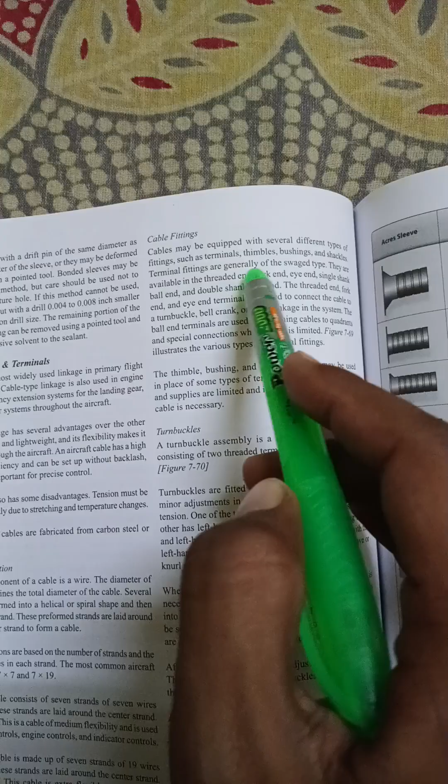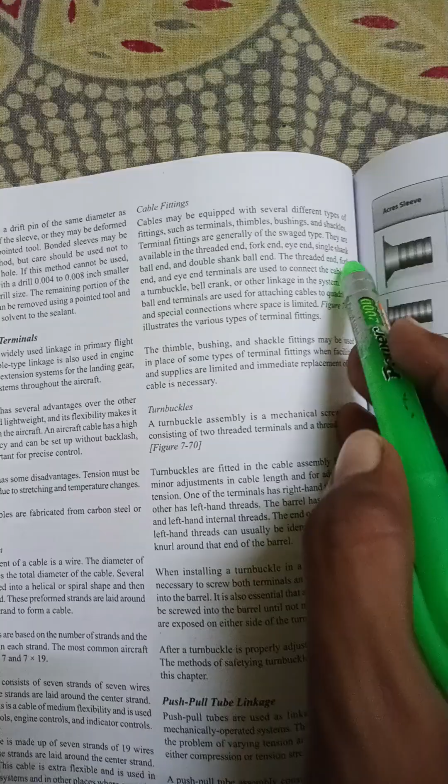These are the cable fitting types. Terminal fittings are generally of the swaged type. They are available in the threaded end, fork end, eye end, single shank ball end and double shank ball end. The threaded end, fork end and eye end are used to connect the cable to a turnbuckle, bell crank, or other linkage in the system. The ball end terminals are used for attaching cables to quadrants and special connections where space is limited.

Illustrated the various types of terminal fittings.

Next we come to turnbuckles. A turnbuckle assembly is a mechanical screw device consisting of two threaded terminals and a threaded barrel.

Push pull tube linkage. Push pull tubes are used in linkages in various types of mechanically operated systems.

This type of linkage eliminates the problem of varying tension and permits the transfer of either compression or tension stress through a single tube.

A push-pull tube assembly consists of a hollow aluminum alloy or steel tube with an adjustable end fitting and a check nut at the other end. The check nut secures the end fitting after the tube assembly has been adjusted to its correct length.

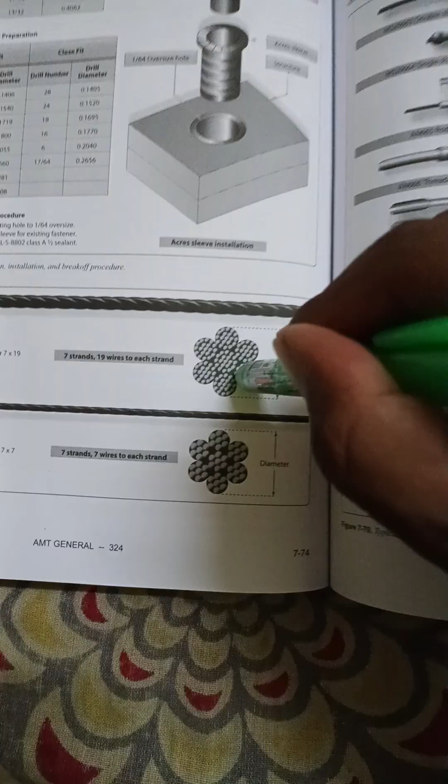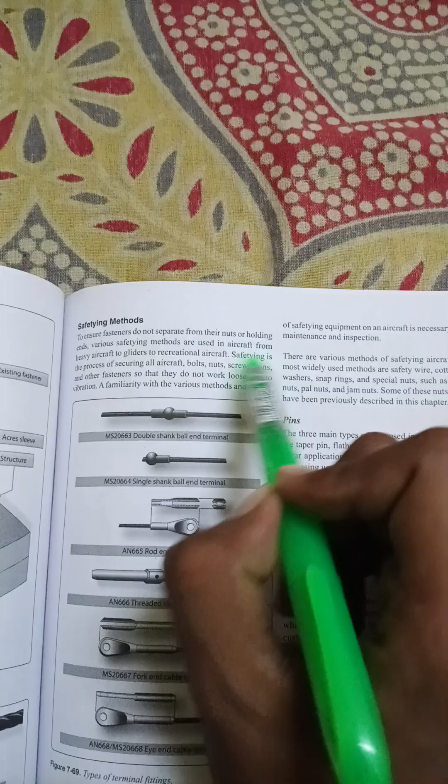Safetying method. To ensure fasteners do not separate from their nuts or holding ends, various safety methods are used in aircraft, from heavy aircraft to gliders to recreational aircraft.

Safetying is the process of securing all aircraft bolts, nuts, screws, pins, and other fasteners so that they do not work loose due to vibration.

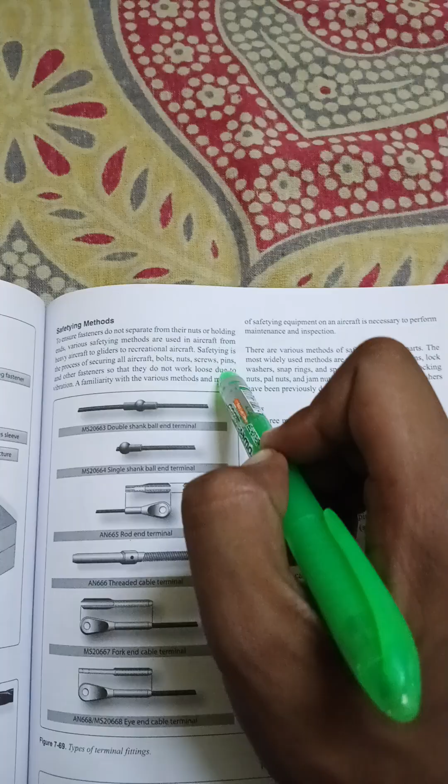A familiarity with the various methods and means is needed. There are various methods of safetying aircraft parts.

The most widely used method is safety wire. The most commonly used safety devices are safety wires, cotter pins, lock washers, snap rings, and special nuts such as self-locking nuts, pal nuts, and jam nuts. Some of these nuts and washers have been previously described in this chapter.

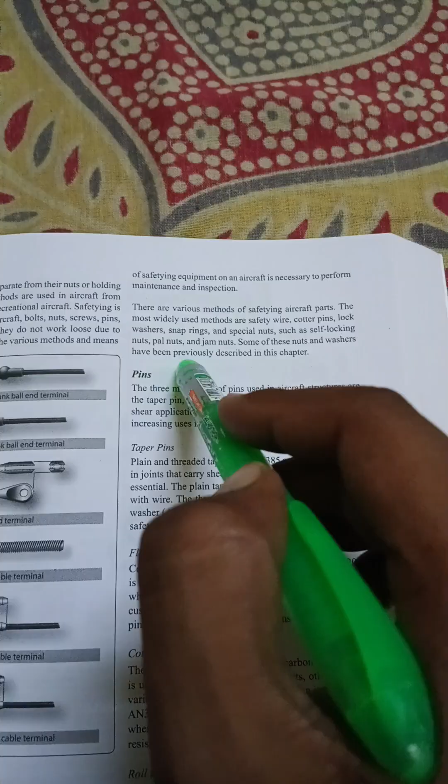Pins. There are three types of pins: taper pins, flathead pins, and cotter pins. Taper pins and threaded taper pins.

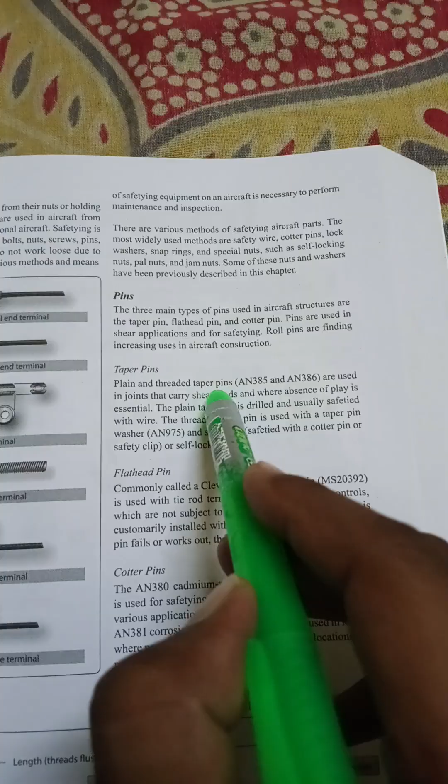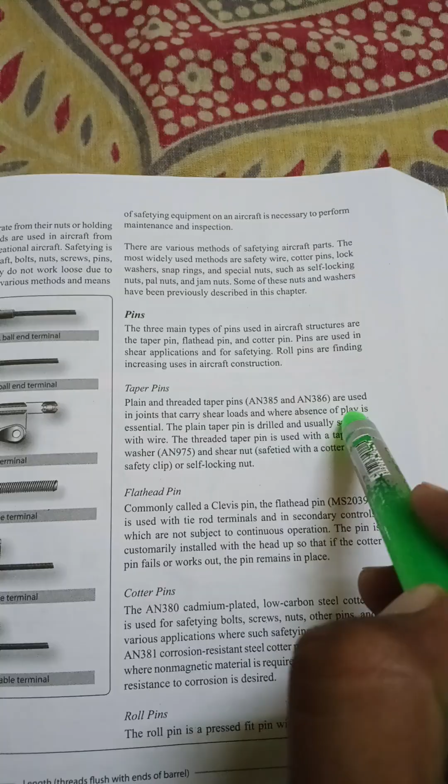AN385 - AN means Army Navy - 385 and AN386 are used in joints that carry shear loads and where absence of play is essential.

Next comes the flathead pin, commonly called a clevis pin. It is also called a clevis pin.

MS20392 is used with tie rod terminals and in secondary controls which are not subject to continuous operation. The pin is customarily installed with the head up, so that if the cotter pin fails or works out, the pin remains in place.

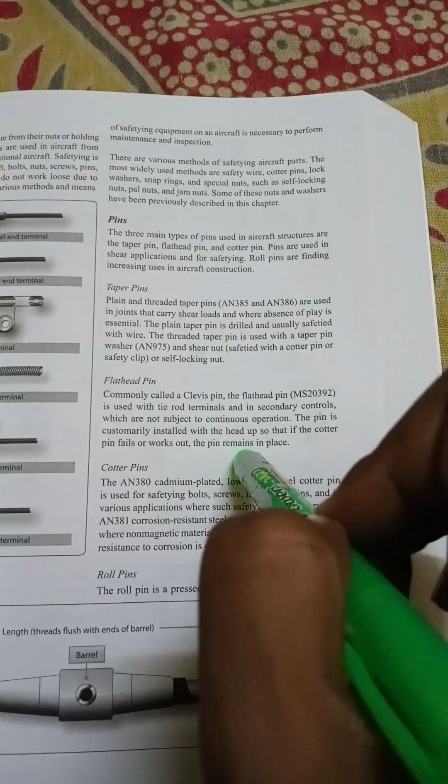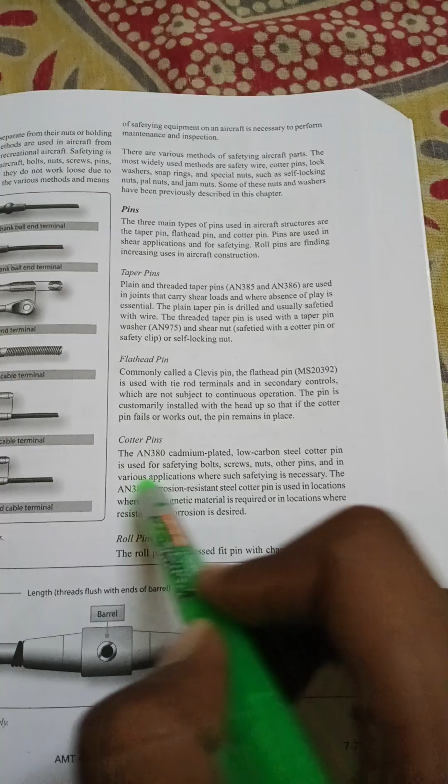If it fails or comes loose, it still stays in its place. Cotter pins: the AN380 cadmium-plated low carbon steel cotter pin is used for safetying bolts, screws, nuts, other pins, and in various applications where such safetying is necessary.

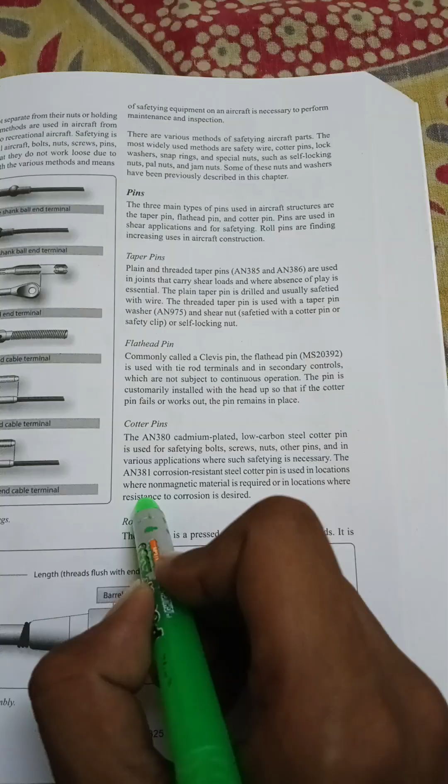The AN381 corrosion resistant steel cotter pin is used in locations where non-magnetic material is required, or in locations where resistance to corrosion is desired.

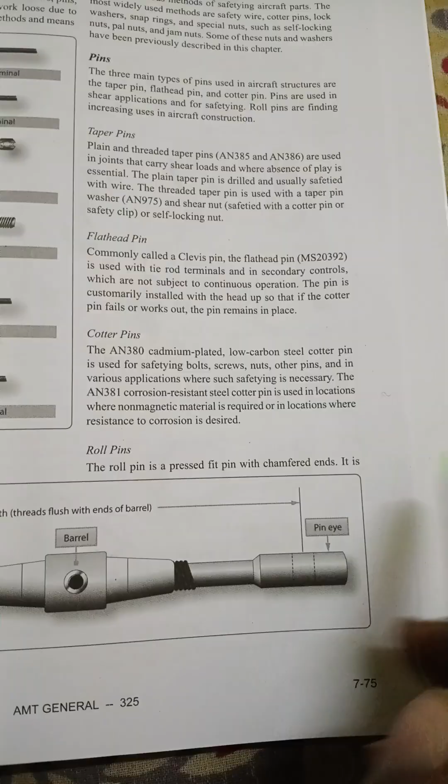Roll pin: the roll pin is a press-fit pin with a chamfered end. It is tubular in shape and is slotted the full length of the tube.

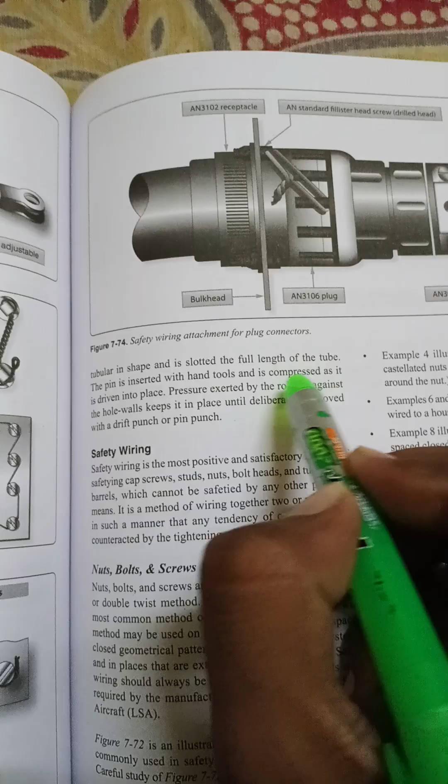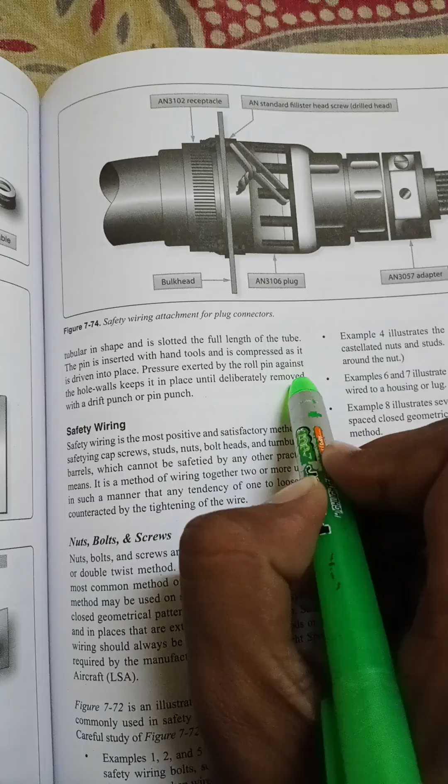The pin is inserted with hand tools and is compressed as it is driven into place. Pressure exerted by the roll pin against the hole wall keeps it in place until it is deliberately removed with a drift punch or a pin punch.

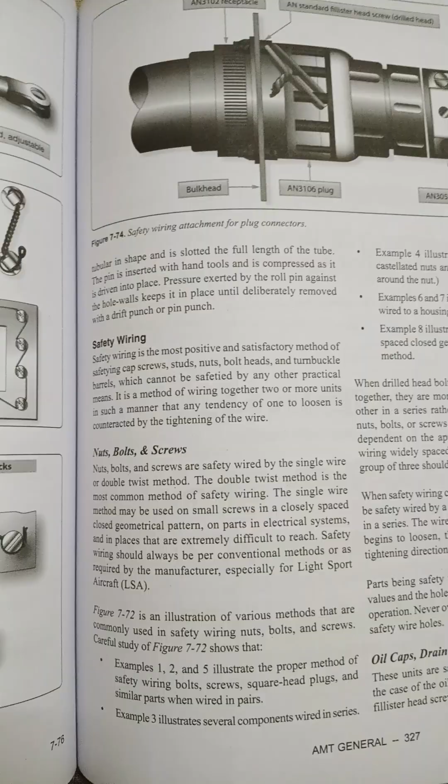Safety wiring. Safety wiring is the most positive and satisfactory method of safetying cap screws, studs, nuts, bolt heads, and turnbuckle barrels which cannot be safetied by any other practical means.

It is a method of wiring together two or more units in such a manner that any tendency of one to loosen is counteracted by the tightening of the wire.

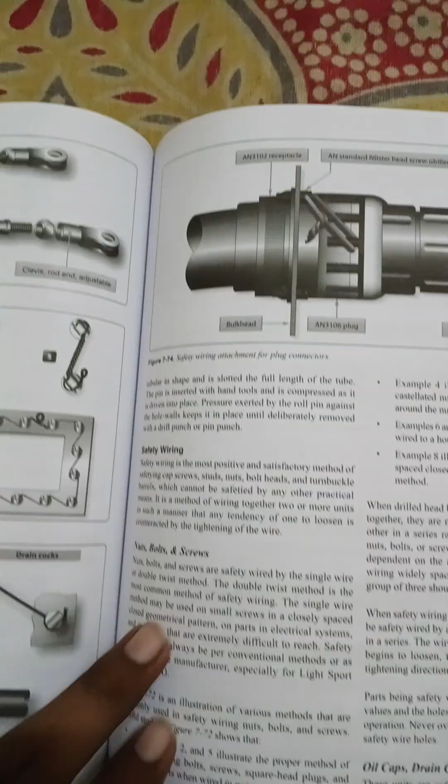Nuts, bolts, and screws are safety wired by the single wire or double twist method. The double twist method is the most common method of safety wiring.

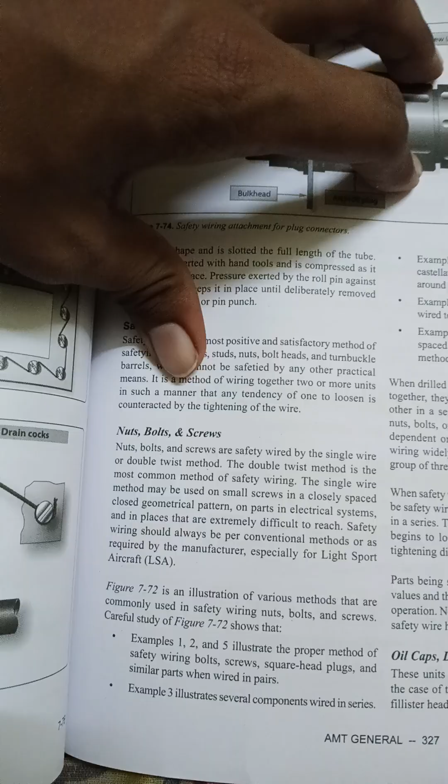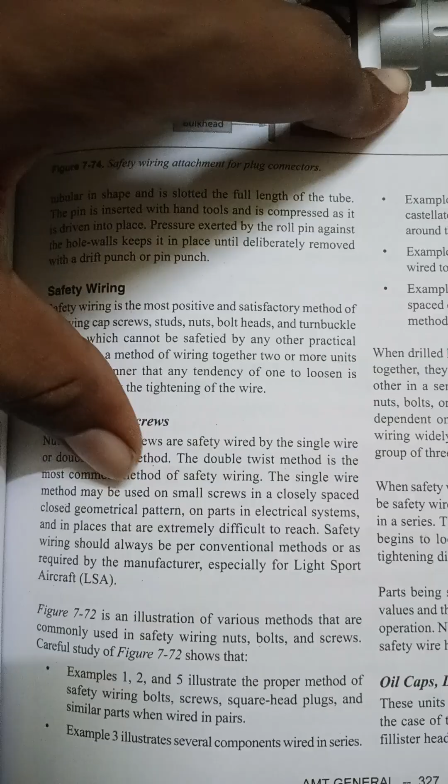The single wire method may be used on small screws in a closely spaced, closed geometric pattern on parts in electrical systems, and in places that are extremely difficult to reach.

Safety wiring should always be done per conventional methods or as required by the manufacturer, especially for light sport aircraft (LSA).

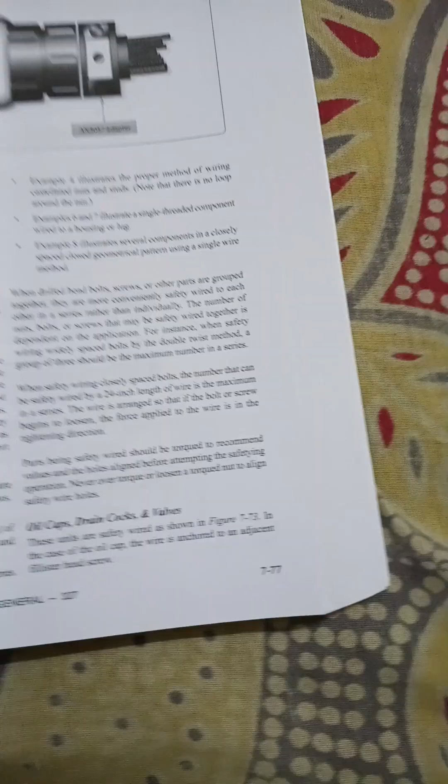Then we come to oil caps, drain cocks, and valves. These units are safety wired as shown in figure 7-73. In the case of the oil cap, the wire is anchored to an adjacent filter head screw.

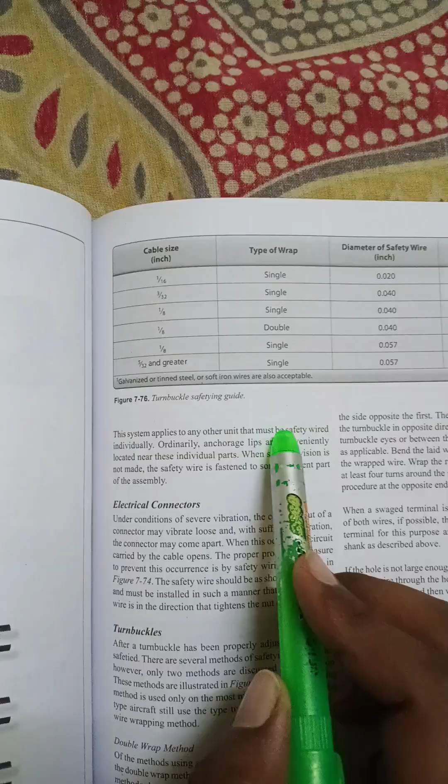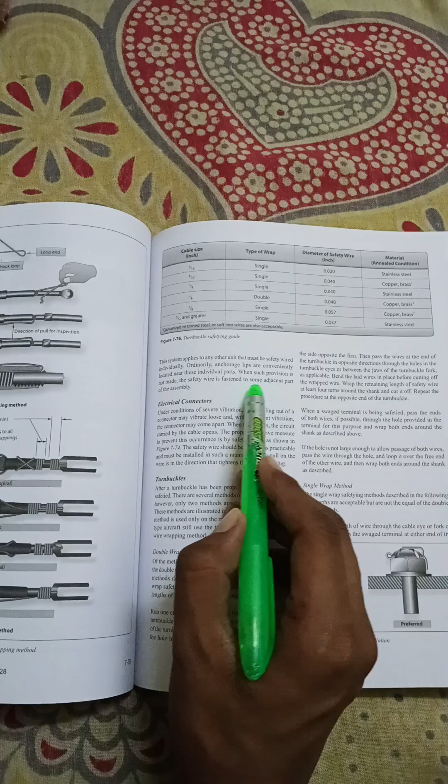This system applies to any other unit that must be safety wired individually. Ordinarily, anchorage lips are conveniently located near these individual parts. When such provision is not made, the safety wire is fastened to some adjacent part of the assembly, such as an electrical connector.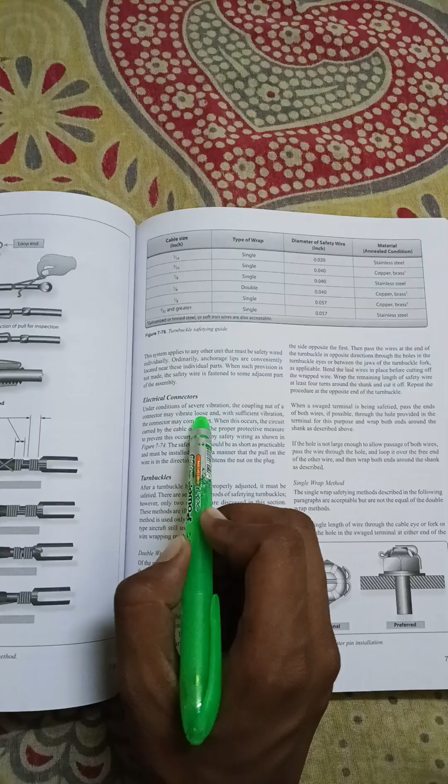Under conditions of severe vibration, the coupling nuts of a connector may vibrate loose, and with sufficient vibration, the connector may come apart. When this occurs, the circuit carried by the cable opens.

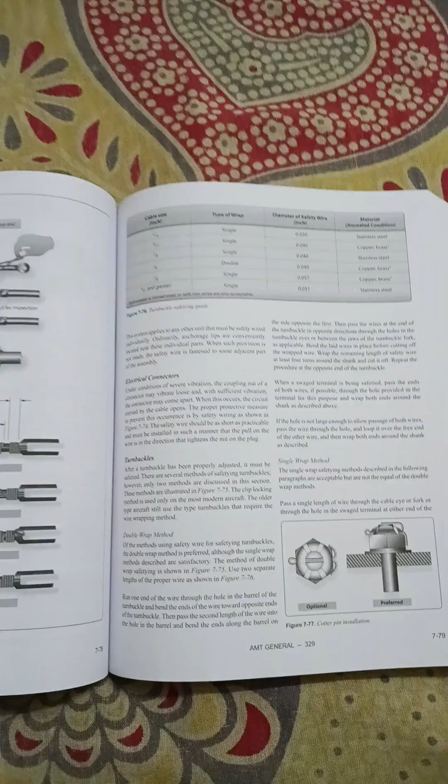The proper protective measure to prevent this occurrence is by safety wiring as shown in figure 7.74. The safety wires should be as short as practicable and must be installed in such a manner that the pull on the wire is in the direction to tighten the nut on the plug.

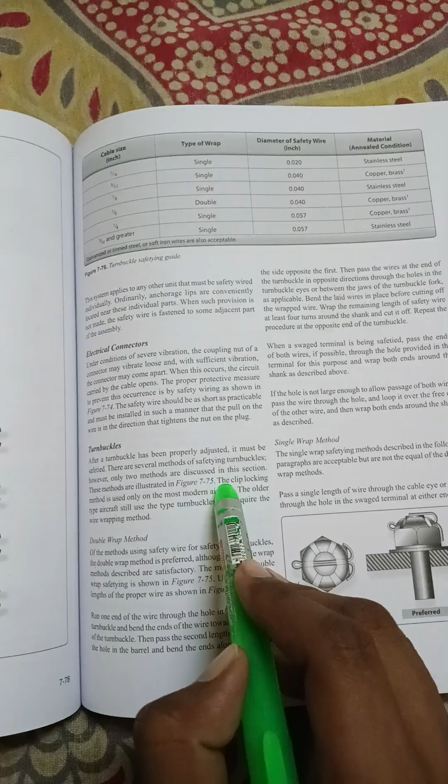Next comes turnbuckles. After a turnbuckle has been properly adjusted, it must be safety tied. There are several methods of safetying turnbuckles, however two methods are discussed in this section. The methods are illustrated in this figure. The clip locking method is used only on the most modern aircraft.

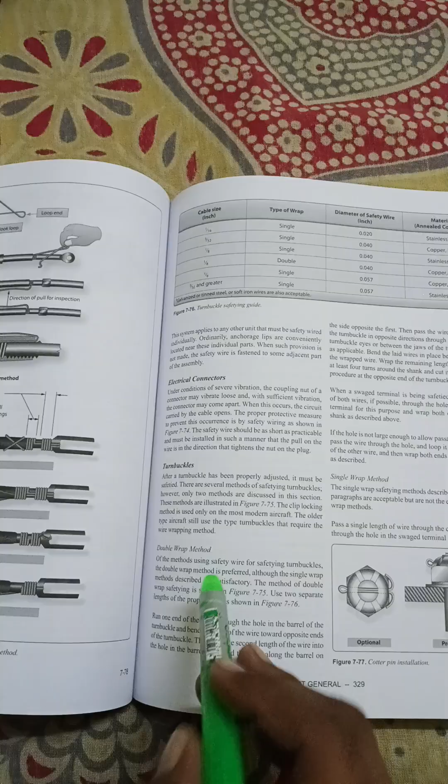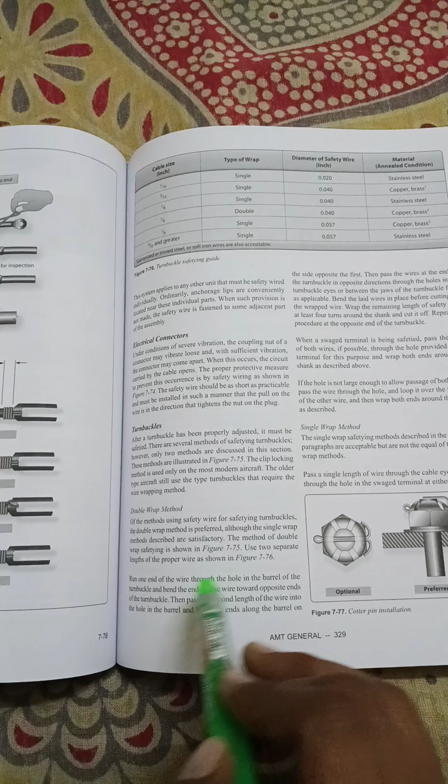The older type aircraft still use the turnbuckle that requires the wire wrapping method, including the double wrap method. Of these methods, safety wires for safetying turnbuckles, the double wrap method is preferred, although the single wrap method is also satisfactory.

Then comes the single wrap method. The single wrap safetying method described in the following paragraph is acceptable but is not the equal of the double wrap method.

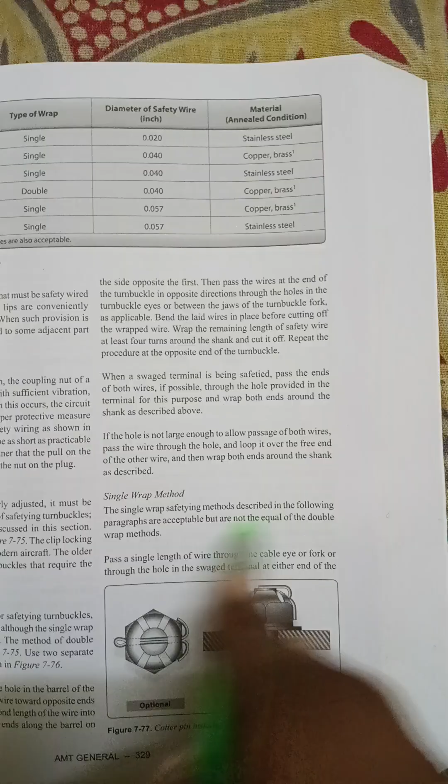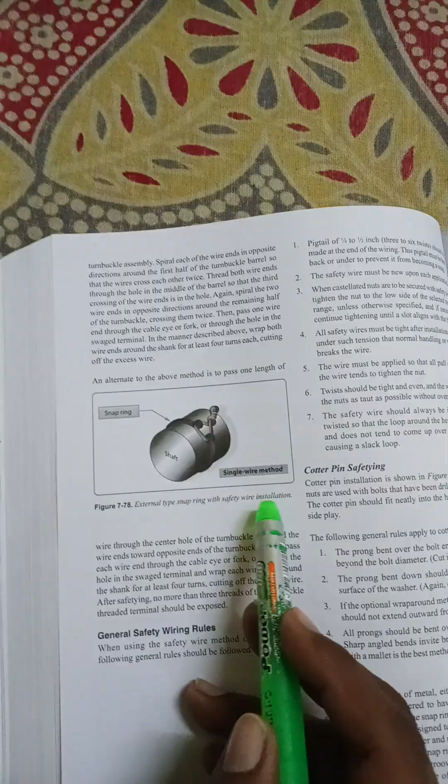External type snap ring with safety wire installation, this comes next and last.

General safety wiring rules. When using the safety wire method of safetying, the following general rules should be followed. A pigtail of 1/4 to 1/2 inch, 3 to 6 twists, should be made at the end of the wire. The pigtail must be bent back or under to prevent it from becoming a snag.

The safety wire must be new upon each application where castellated nuts are to be secured with safety wires. Tighten the nut to the low side of the selected torque range unless otherwise specified, and if necessary continue tightening until a slot aligns with the holes.

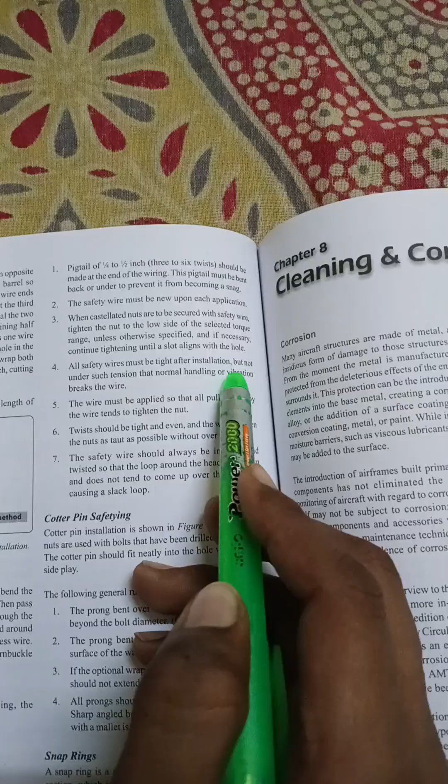All safety wire must be tight after installation but not under such tension that normal handling or vibration breaks the wire. The wire must be applied so that all pull exerted by the wire tends to tighten the nut.

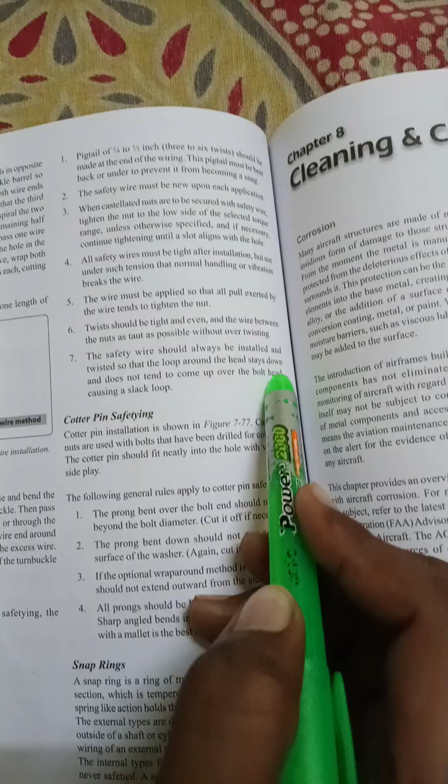Twists should be tight and even, and the wire between the nuts as taut as possible without over twisting. The safety wire should always be installed and twisted so that the loop around the head stays down and does not tend to come up over the bolt head, causing a slack loop.

Next comes cotter pin safety. Cotter pin installation is shown in figure 7.77.

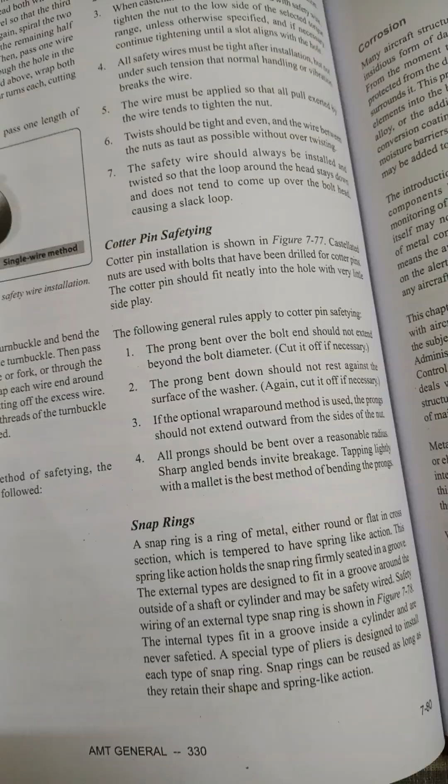Castellated nuts are used with bolts that have been drilled for cotter pins. The cotter pin should fit neatly into the hole with very little side play.

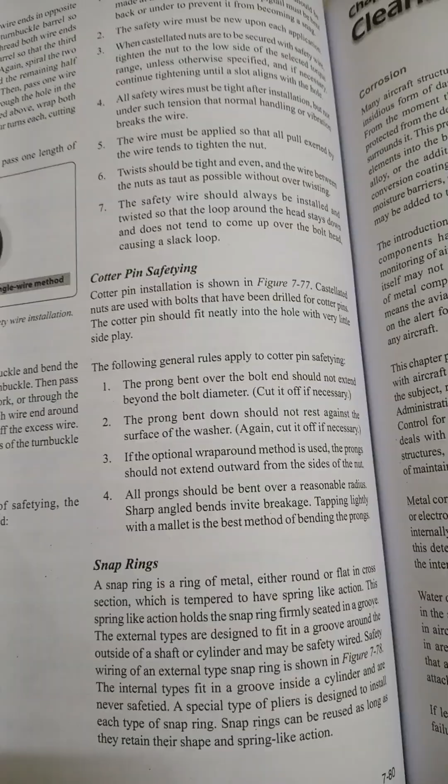The following general rules apply to cotter pin safety. The prong bent over the bolt should not extend beyond the bolt diameter. The prong bent down should not rest against the surface of the washer.

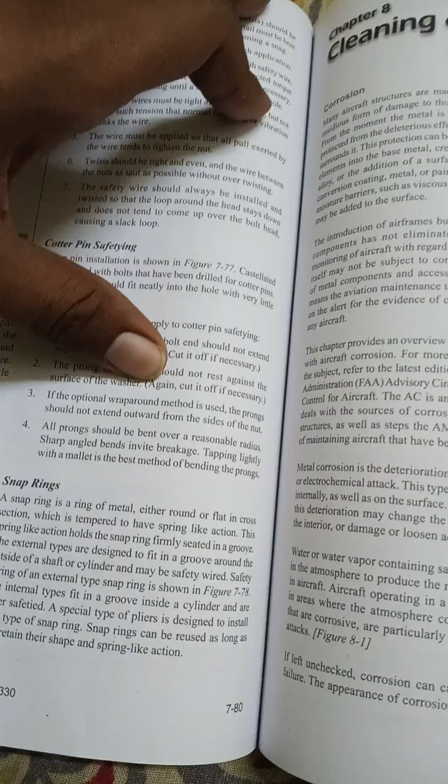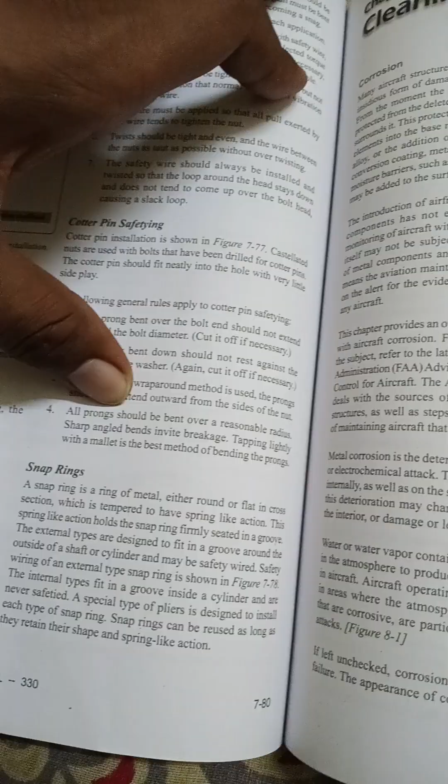If the optional wrap around method is used, the prong should not extend outward from the side of the nut. All prongs should be bent over a reasonable radius, as sharp angle bends invite breakage. Tapping lightly with a mallet is the best method of bending the prongs.

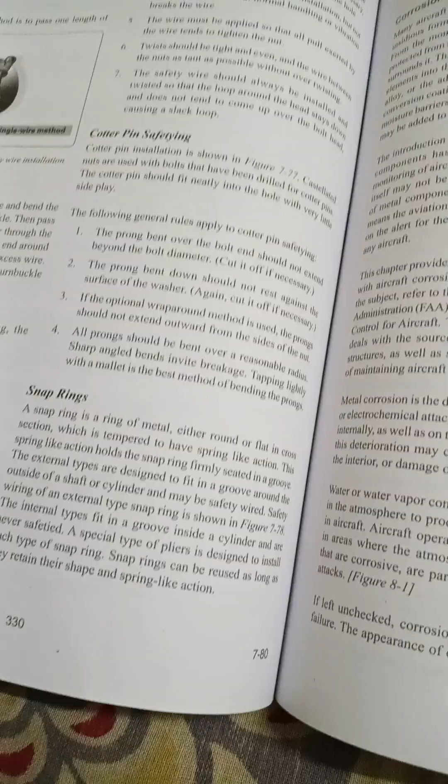Last, we have snap rings. A snap ring is a ring of metal, either round or flat in cross section, which is tempered to have a spring-like action. This spring-like action holds the snap ring firmly seated in a groove.

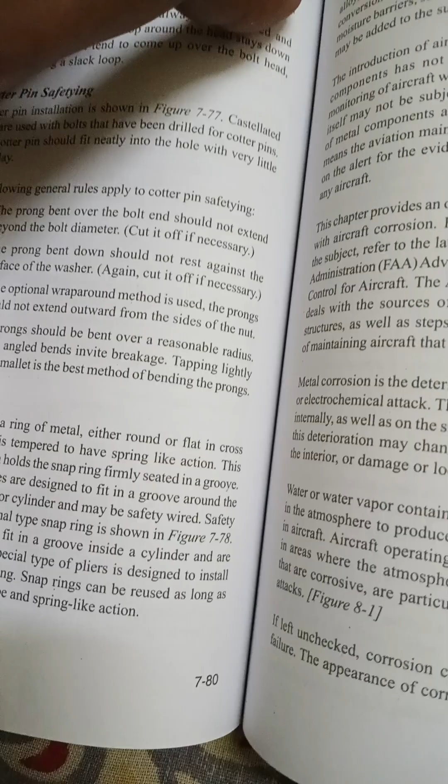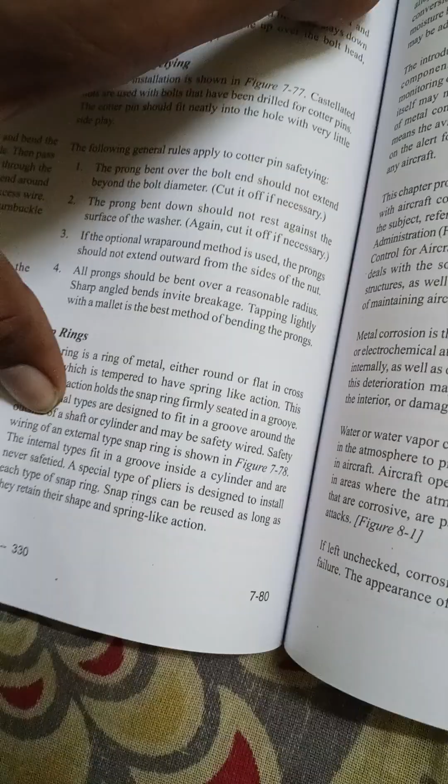The external type are designed to fit in a groove around the outside of a shaft or cylinder and may be safety wired. Safety wiring of an external type snap ring is shown in figure 7.78. This is the snap ring.

The internal types fit in a groove inside a cylinder and are never safetied. A special type of plier is designed to install each type of snap ring. Snap rings can be reused as long as they retain their shape and spring-like action.